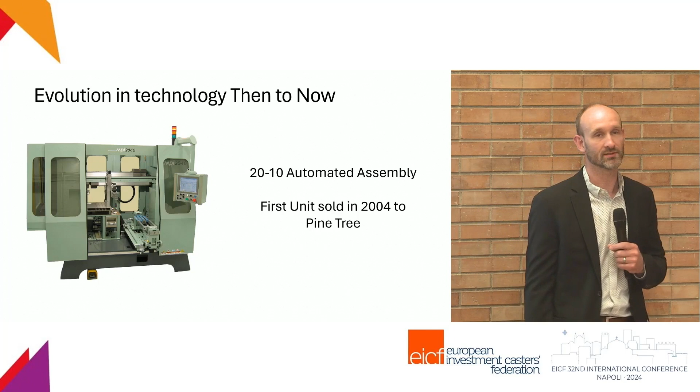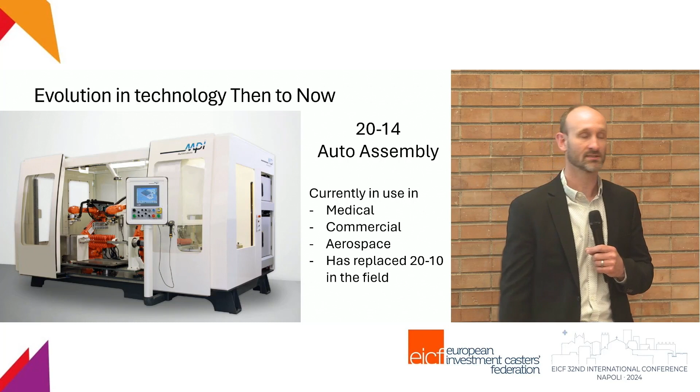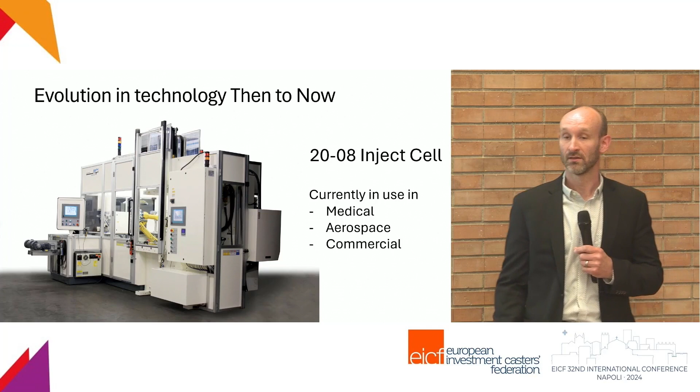That then evolved into what we call our 2014, which is really the gold standard now for automated assembly and has replaced the 2010s out in the world. We've since then developed automated injection. What's nice about this is it's not only duplicating what the operator is able to do at the machine, but also in some cases increasing what's able to be done at the machine, such as serialization of the parts live as they're coming out. So you can really track a defect right from wax all the way through. And these are fully customizable based on the requirements of our customers.

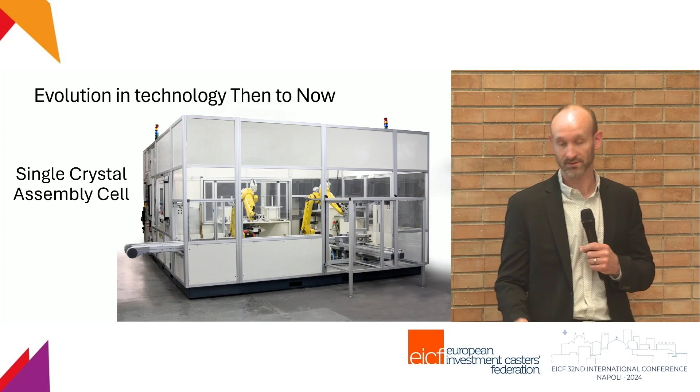We've developed fully custom, very job-specific automated assembly cells. This one is for single crystal assembly specifically. This is an assembly cell that is designed specifically for, and is running today, IGT components, so lower volume, but high mix, multi-plane, multi-level welds, and utilizing full 3D scanning so that we can get an optimal position every time, even with the varying runner.

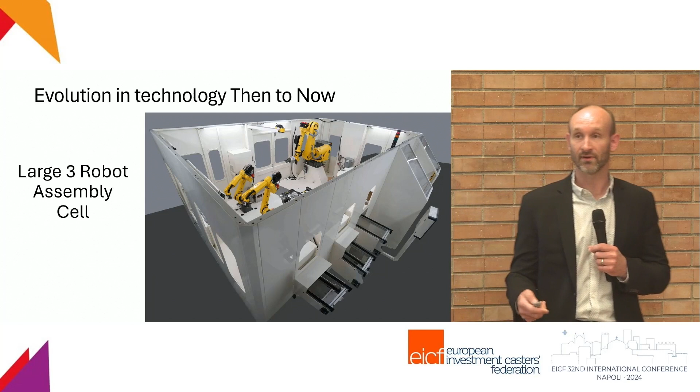And from all of that, we've taken all that we've learned and we've really developed what we would build for ourselves working with a commercial customer. And this is one of the pieces of equipment we'll focus on today. So we've been working with Tech Cast, who is a local foundry about 4 hours from MPI. They are a commercial, low volume, high mix, ferrous metal foundry.

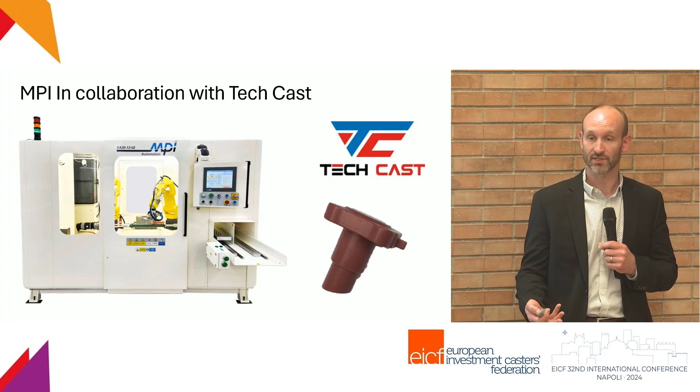And they came to us because they're having labor problems, they're having issues getting supply out, and they need higher quality and need to step up their game. So we thought this was a good opportunity to share real world results with all of you. So for our first production run, we had a small part, only 0.11 kilograms per finished metal pattern. We ran a total of 13,500 parts, so everything that you're seeing is based off of 13,500 patterns. In the test, we had 3 assemblies.

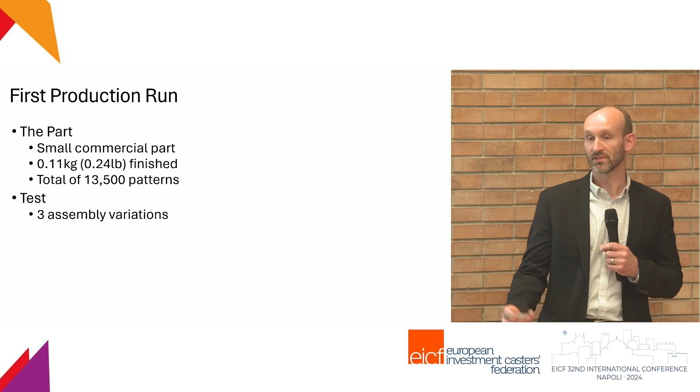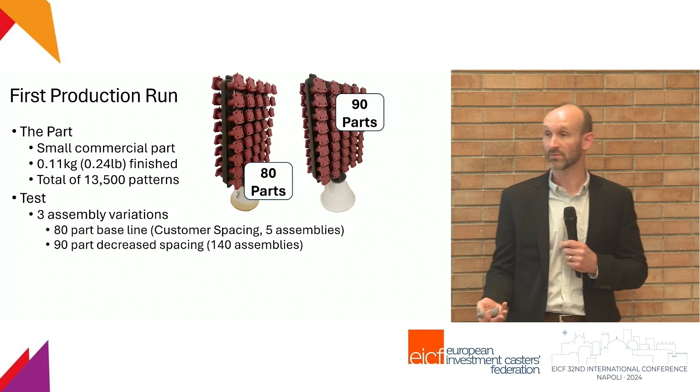And then lastly, to round out, we wanted to set up for success going forward because we believe we'll be able to do better than that 90 parts per assembly. So we made an assembly with 106 parts. Now, previous to now, this wasn't possible, and these are essentially the same assemblies, although we have added an additional 8 parts per side.

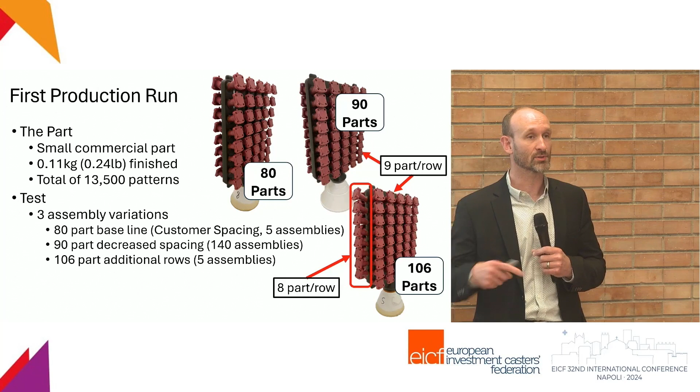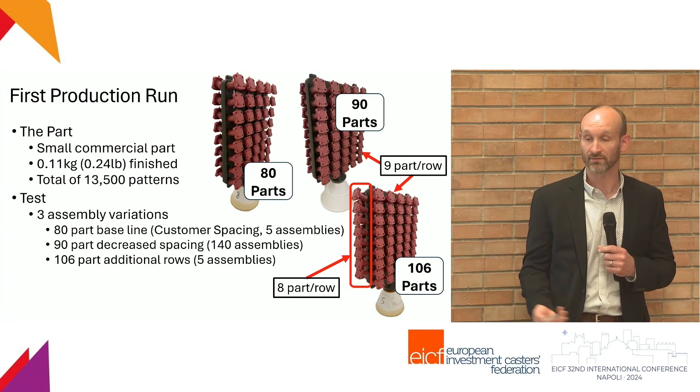And because this automation is now putting one part on at a time, we're able to vary the orientation of the rows, the number of parts per row with a fully automated solution. First time setup is about an hour for a tree. Once it's there, that's in the recipe. Now we can run any of these 3 assembly mixes with the push of a button and selection of a recipe, just like you would with the wax press or any of your other equipment. We shipped 150 assemblies in total.

And this is the existing process that we took over. So that on the left is a Model 44. It happens to be the machine that they were running. This is a horizontal, we would call it an automatic press. Actually the one they have is pretty beat up, so they weren't running it in full automatic.

But it's a machine capable of producing parts, dropping them into water, and then you have an operator standing at the end of the conveyor, removing the patterns, trimming the patterns, inspecting the patterns, and moving on to the next step, which is a manual assembly. And they were building 23 assemblies in a day, and it took 3 people. So 2 people assembling and 1 person running the injector.

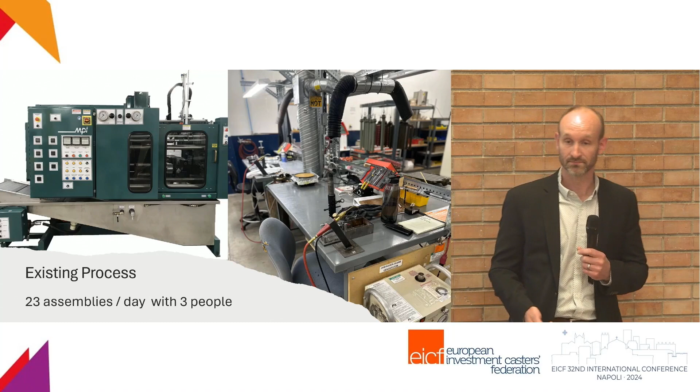So come to MPI, when we took over this project for them, we put it onto a horizontal, what we would call our 20-06 automated injection cell and our 20-12 automated assembly cell. And right away that brought us to the point where we're doing 25 assemblies per day with 1 operator running both pieces of equipment.

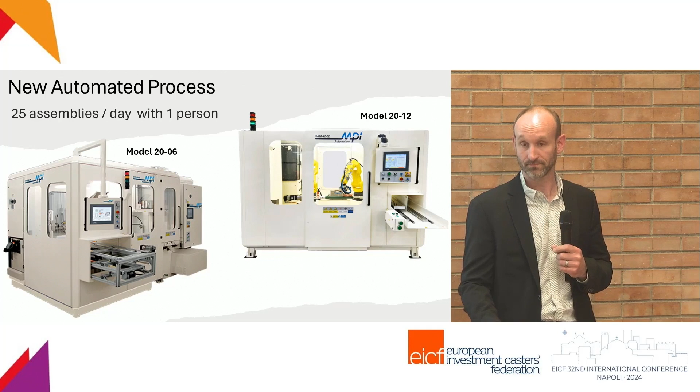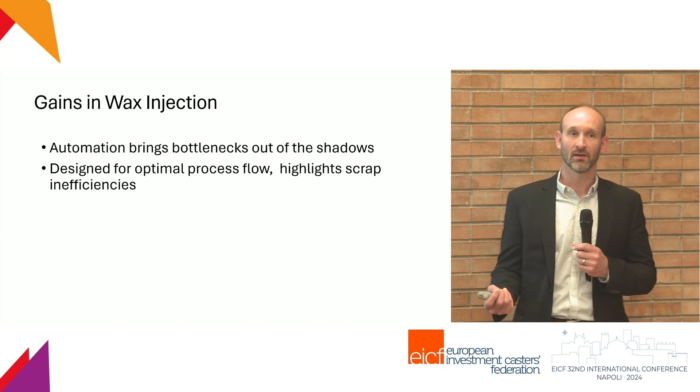What we're really here for is what are the gains in all of this? So the gains in wax injection: what's nice about the automation is it really brings out the bottlenecks, and this equipment is designed for optimal process flow. So in a perfect world, we'd all run single piece flow. We all know the first thing we do is put multiple parts onto a tree. So we don't ever really do single piece flow, and this equipment is designed to match the optimal flow of the foundry that's using it.

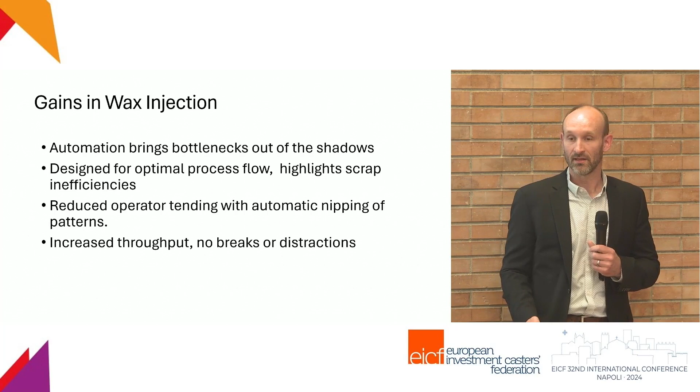Reduce operator tending with the automatic nipping. So the injection cell, in this case, we are utilizing it to nip the patterns, and because it's handling every pattern individually and moving it out of the way, we never are getting any damaged patterns from falling on top of each other or handling, and they're coming out to the operator ready for assembly. Again, no breaks or distractions.

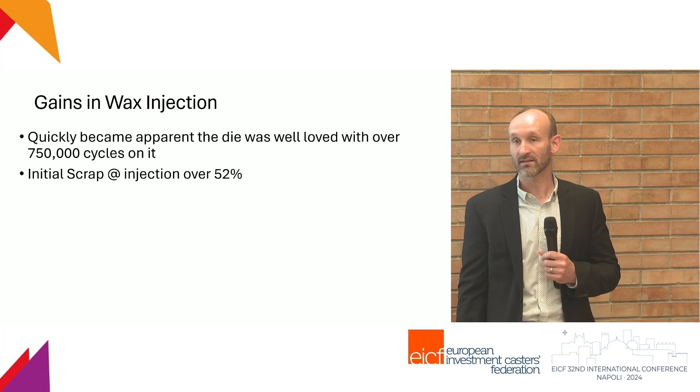When we first got this, and I will say that this is very common when we work with a customer and we get a tool for the first time, we always ask the question, how is the tool? And they say it's great, one of our best tools, it's ready for automation. It became very apparent this was a well-loved tool with 750,000 cycles on it, and right out of the gate, although we were getting good injections, we were getting 52% scrap.

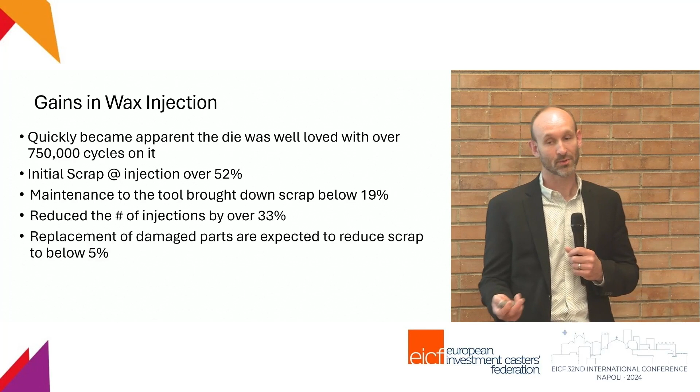We were able to clean the die. So this is just how we got it from our customer. We cleaned the die and instantly reduced down below 19%. Unfortunately, the die was reasonably damaged. All right, so the die was damaged. We'll be able to reduce that well below 5% once we replace some of the damaged components of the die, but it is damage coming to us.

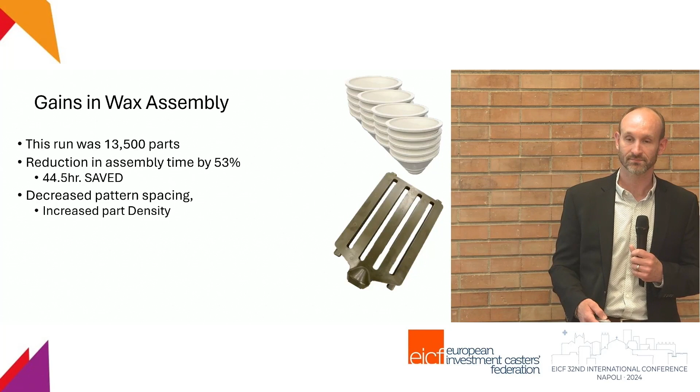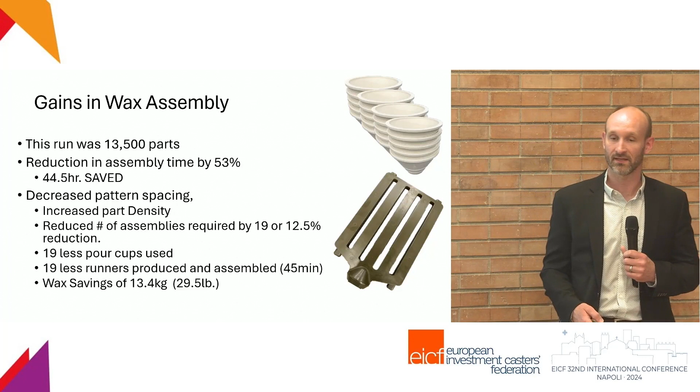When running these parts with the automation, we're down to 44.5 hours of labor saved. We decreased the pattern spacing, increasing the density, and we were able to reduce the total number of assemblies needed by 19 for this production run, or 12.5%. That means 19 fewer pour cups used, 19 fewer runners being assembled, 19 fewer trees being made, and a total wax saving of almost 30 pounds or 13 kilograms.

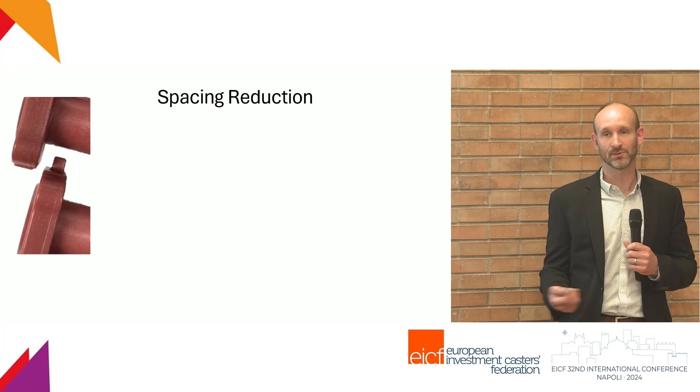This is an example of the spacing reduction. We went from 12.7 millimeters to 3. Now, something that often comes up is: we can't cast that, it's too close. So I ask, if this was a part geometry that your customer came to you with, would you say I can't do it, or would you figure out how to achieve it?

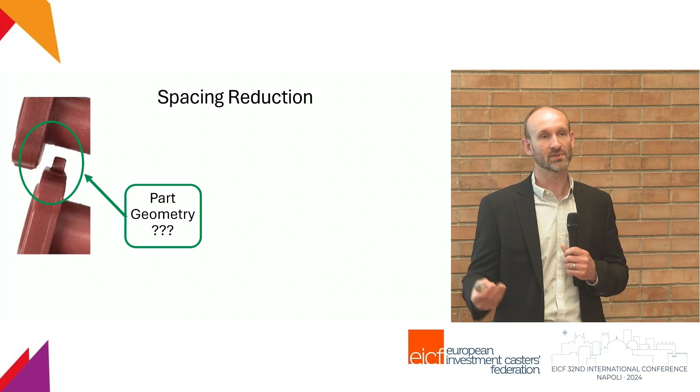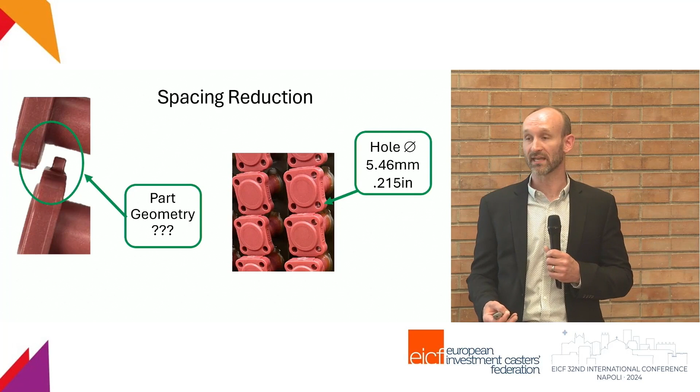What automation does is it allows you to have that consistency in an assembly that you would have in an injected pattern, right? So this is the geometry they're doing today. We know right out of the gate, maybe we can't go as close as we did, maybe you can. We certainly can go as close as that hole is in diameter.

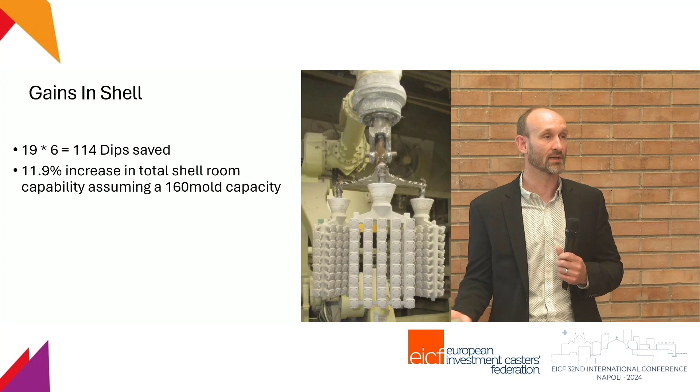Gains in the shell: again, reducing 19 parts reduces the number of dips required. Because there's 19 fewer trees, their bottleneck is 160 mold capacity, or 11% of capacity. I just ask you, what is the value if you had to go and buy 11% of your shell room? 38 minutes labor saved, just loading and unloading the trees.

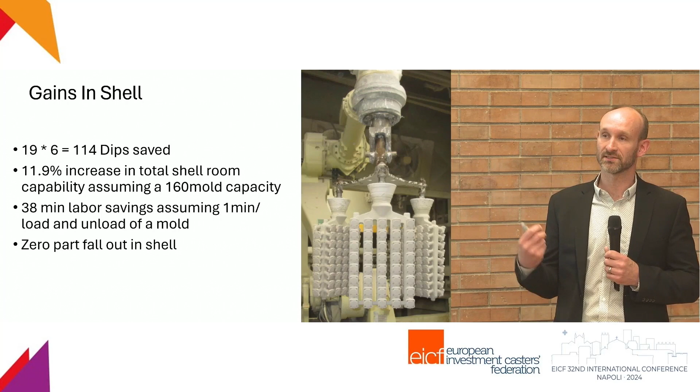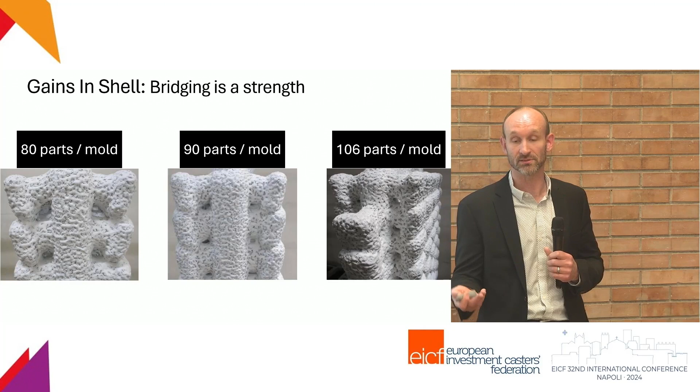0 part fallout. This is important. We see this on all of our automation projects. The consistency and the strength of the weld results in 0 parts breaking off in shell. Gains in shell, so we do see a lot more bridging when we do this. This is often perceived as a weakness. What we have found in practice is it's really a strength, and it does allow you to use less shell, and you get a stronger shell faster.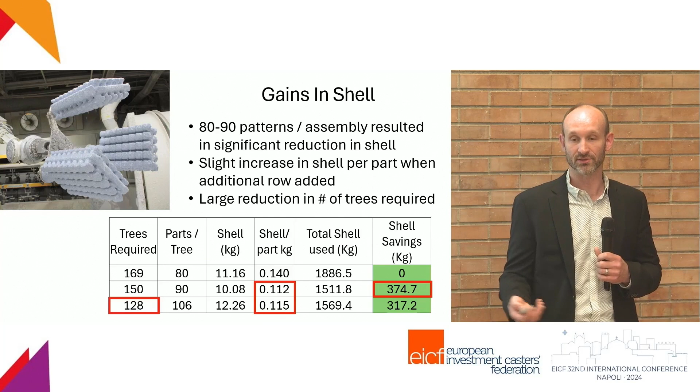So by reducing those 19 trees and increasing the spacing, we saw a gain of 374 kilograms. We did see a slight increase in the amount of shell used per pattern when we went to the larger density. And it really then becomes a question of what's the right density for you and your facility. We will be moving to a higher density with TechCast in the future.

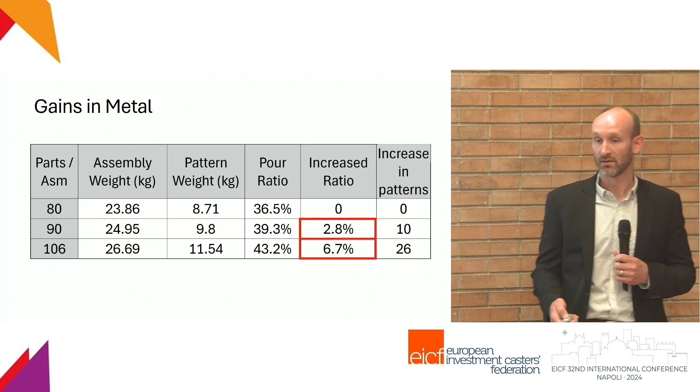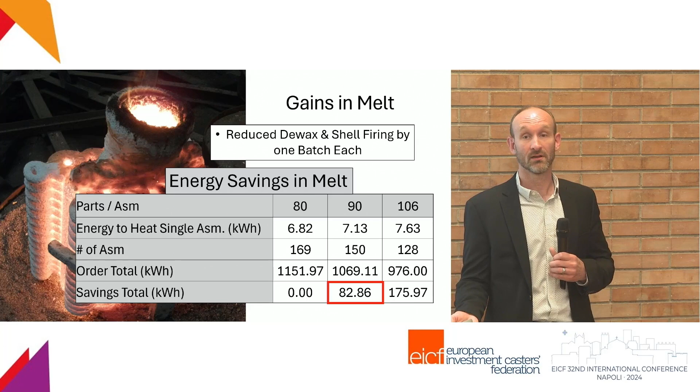Gains in metal. We increased the pour ratio. It's a very small part, so it wasn't a huge increase. 2.8%, 6.7% if you use the higher density tree. Again, 19 fewer trees, so that's 19 fewer heats, 19 fewer dewaxes, or a batch in each in their case. We're estimating that we're saving 82 kilowatt hours of energy in just metal melt. There's other additional energy that we're saving throughout the rest of the facility, but the metal melt's a big one.

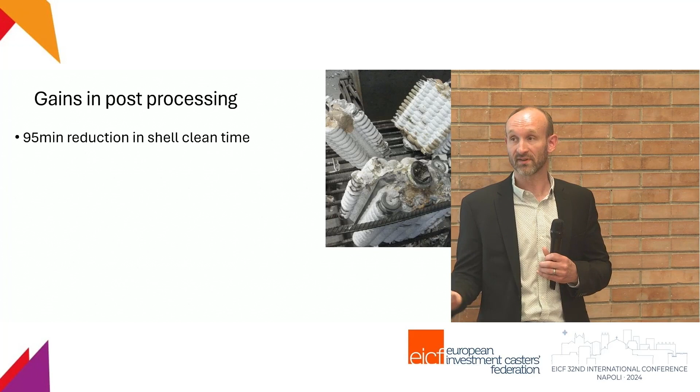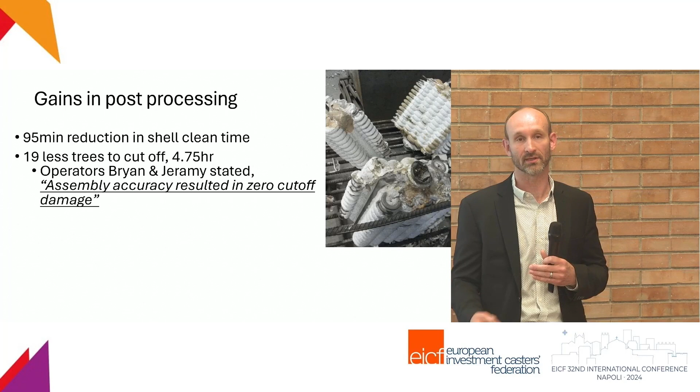Post-processing: saving 95 minutes in knockoff, assuming 5 minutes to knock off a tree. 19 fewer trees to cut off, assuming 15 minutes per tree, saving 4 3/4 hours. What was notable is the operators came back and pointed out to their manager that the consistency was so good that they didn't have any cutoff damage, and they were able to get all the parts in one go and get a closer cut to the gate, which means less downstream processing as well. In the future, we'll be looking at automating the cutoff.

So total gains as a recap. Total savings, 52 man-hours for 150 trees. 374 kilograms of shell material that doesn't need to be mined, transported, mixed, or put into your vat. 289 kilograms of metal saved. 82 kilowatt hours of energy saved. A little over 11% capacity saved in the shell room, which is their bottleneck process.

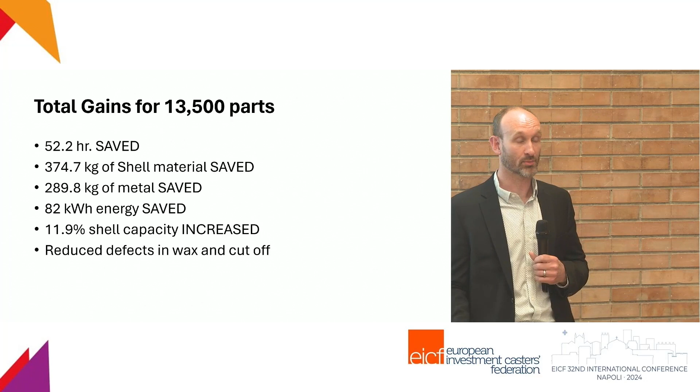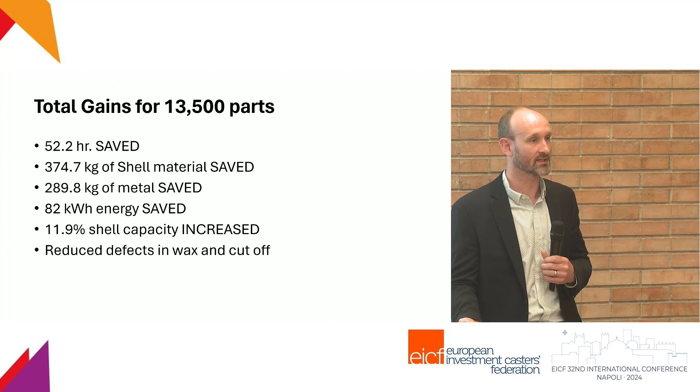Reduced wax defects in the wax and cutoff. We often see a decrease in scrap. This was a very well vetted part, and they really had the assembly down. They had a very low scrap from casting defects, so we didn't see a gain in this one. It was a pretty robust part from that standpoint.

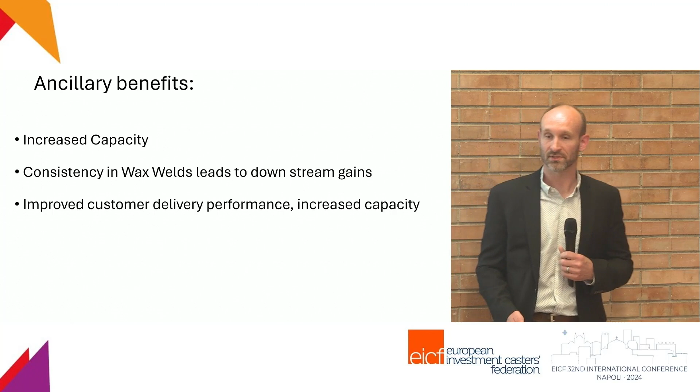And then ancillary benefits: increased capacity, consistency in wax welds. It leads to downstream gains, improved customer delivery performance, increased capacity, reduced labor requirements. And in this case, because we're delivering it, it was $100,000 that they wouldn't have been able to ship to our customer per month, right? They had no way of producing this, so it was an injection into their facility, which is pretty nice.

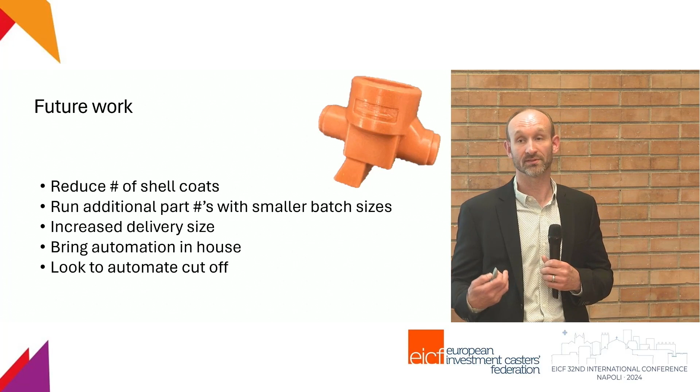Future work: we're going to continue to reduce the number of shell coats. We're gaining that extra strength by bridging faster, so we'll reduce the shell coats. Run additional part numbers with smaller batch sizes. I mentioned in the beginning, this machine's really designed for small batch runs. This was the first part that we're running with this customer, and they just wanted to start with one part number. Bring automation in-house, so we're really developing a process that they're able to take on and onboard on their own, and look to automate the cutoff in their facility in the future.

One of the things that we have noticed as we've been running this equipment is that really smart, intelligent automation leads to easier onboarding of new employees. We did a real deep dive into that at the last ICI. If you're interested in that, I'd say take a look at it. I won't go into it now, but we're able to bring in a brand new operator off the street and in a matter of minutes have them out-producing any senior level operator. That's been a real big gain for us because when we have a good employee, I don't have to stick them to wax assembly. I can move them anywhere else in the facility, and it gives us a lot of flexibility as a business.

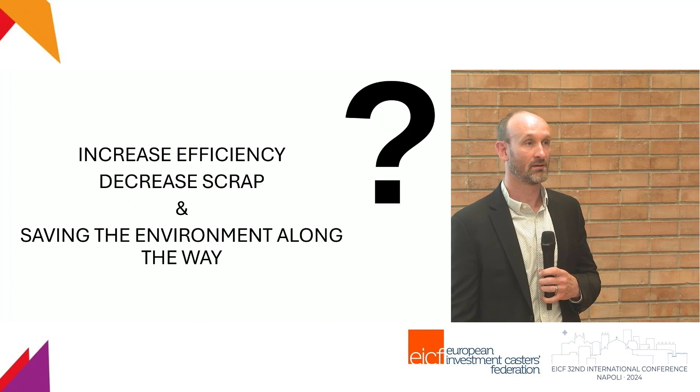So with that, any questions? I think I ran a little long. Am I fine? All right. Yes, you have some questions from the audience for Aaron? One in the back. It's a hard setup to see the timing, so I apologize if I rushed that a little. Yeah, thanks for sharing that.

I'm curious, as far as a low volume, high mix shop, how do they succeed in automation when a lot of the shops I walk into don't know if they're going to have that part or any foresight for how long? If you have any comments on that. Yes, that's a good one. The question is, how do you utilize automation if you're really low volume, high mix? Our past automation has always picked up an entire row, which required really high quality runners and a lot of high volume. This machine now, we're picking up only one part, so we use much more generic tooling, so the tooling cost is very minimal. The trays are just made out of bar stock, and the machine really compensates for any variation in the runner.

Additionally, we've built what we're calling our intelligent automation or smart automation, and it's really designed in the software end so that an operator, someone who has no robot experience, can in a couple hours be trained to set up this machine. Once somebody's set up the machine a couple times, it takes our operators about 20 to 30 minutes, maybe an hour to set up the first time. And once it's been set up the first time, then it just runs.